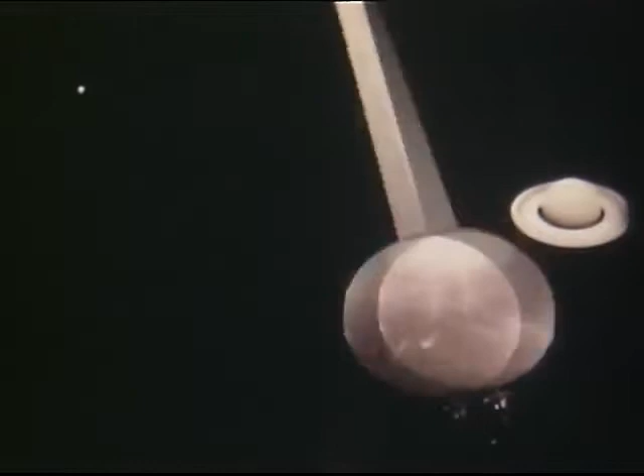Time, intangible, elusive time, measured in years by the broad movement of planets, measured in seconds by the inventions of man.

Seconds, tiny fragments of time, marching single file down through the ages, writing the pages of history as they pass in review. 60 seconds every minute, 3,600 seconds every hour, 86,400 seconds every day.

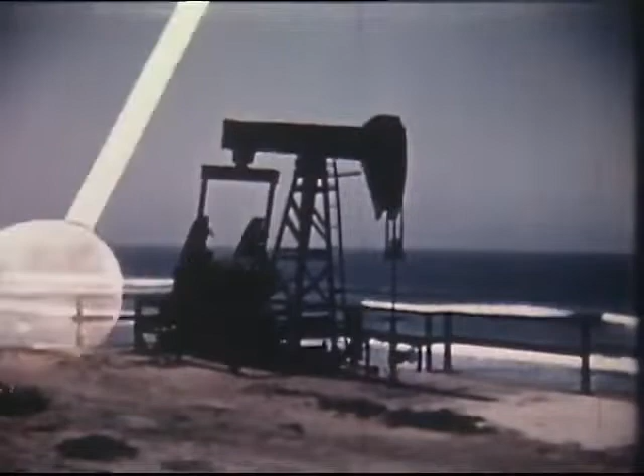And with the fleeting life of each and every second, more than 6,000 gallons of oil are brought up from the earth.

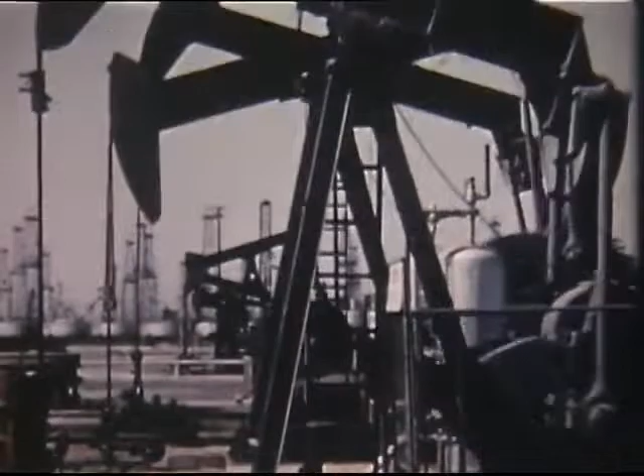Oil from the east, oil from the west, the north, and the south, oil from 30 states of the USA, and from 50 countries of the world. Oil coming from the earth in huge quantities to fill our increasing demand. In the United States alone, enough oil is produced daily, in fact, to float a giant ocean vessel.

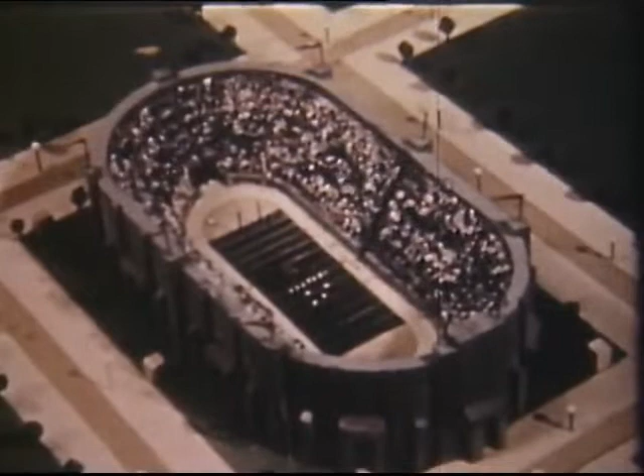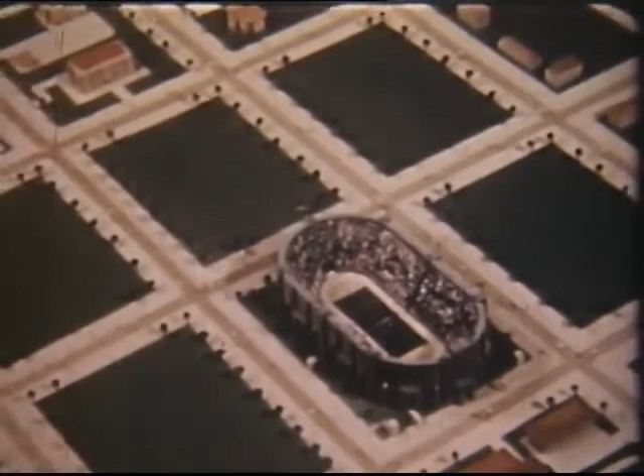And that's a job calling for a lot of manpower. For example, a famous football stadium seats over 100,000 persons. Yet 20 stadiums of this size can be filled to capacity by the number of persons steadily employed in the oil industry.

Many men, many jobs, and all because less than 100 years ago, someone had an idea. An idea that perhaps a man could find oil in huge quantities by boring a hole into the earth. The idea of drilling specifically for oil was new, but the principle employed was an old one.

Almost 3,000 years ago, the ancient Chinese had developed a laborious method of drilling for salt. The well drillers would jump on a springboard, something like a diving board. This would give slack to the rope supporting the drill tool, causing the tool to drop and pound into the earth.

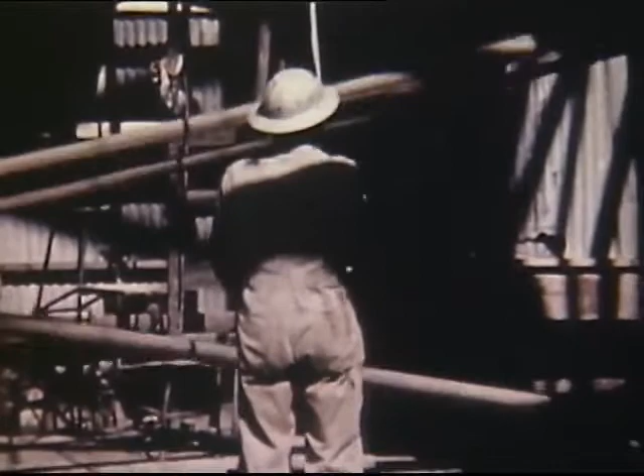Out of this principle evolved the early method of drilling for oil, cable tool drilling, in which a walking beam took over the job of lifting and dropping the drill tool to pound a hole.

Now, there are two common ways of forming a hole. One way is to pound or punch out a hole, as in cable tool drilling. The other way is to bore or scrape out a hole, and that's the idea behind modern rotary drilling.

Using rotary drilling methods, the search for oil has gone to almost unbelievable depths. The famed Empire State Building towers more than a quarter of a mile above the streets of New York. Yet its colossal height could be sunk into the depths of one of the world's deep oil wells.

And another such building, and another, and another, and yet another, until 15 Empire State Buildings had been sunk to approach the depths which have been reached by rotary drilling.

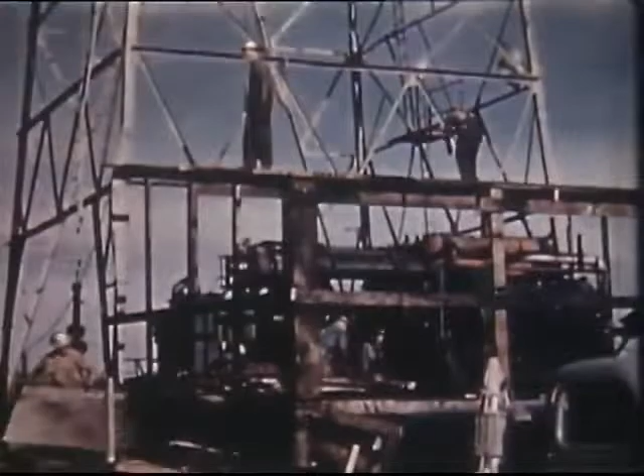Suppose we watch the big job of sinking a deep well by the rotary method. The work begins with the erection of the derrick and the installation of the rig.

This equipment may have cost up to $250,000, not to mention the $50,000 that may have been spent just getting into the well location. Before this exploratory well is completed, it may represent an investment of $1 million, and the chances of actually finding oil are about 1 in 9.

With the derrick and rig installed, drilling operations get underway. We are making holes.

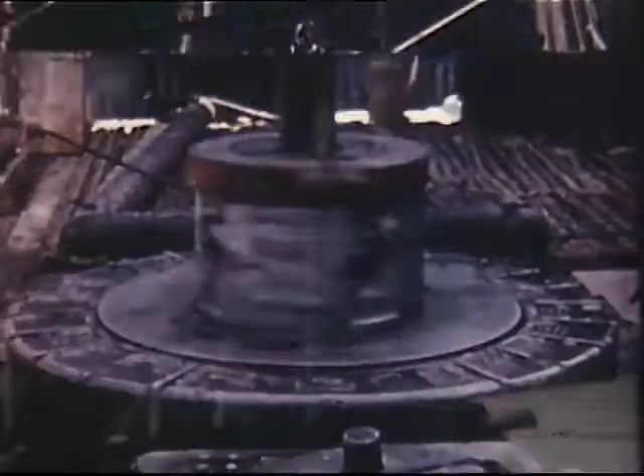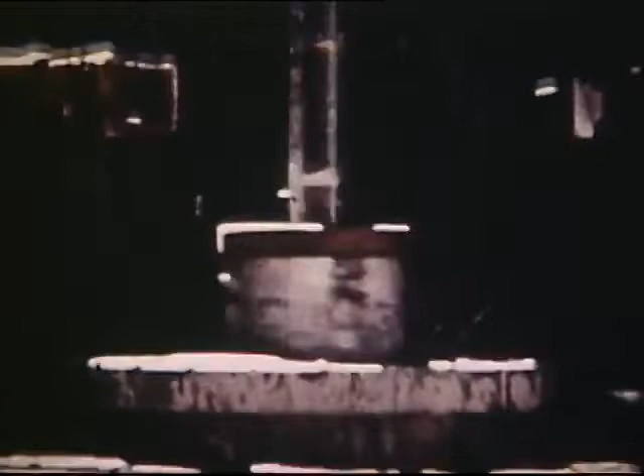A heavy steel rotary table turns the drill string below ground. A square hollow pipe called the Kelly works off the rotary table and fitting through a square hole is free to move up or down.

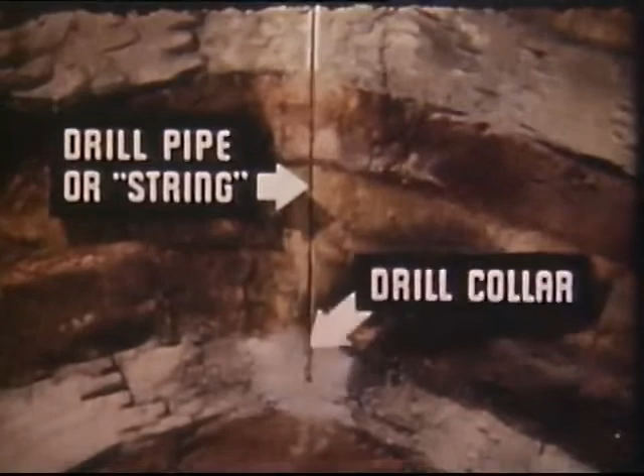Fitted to the Kelly is a length of drill pipe. More and more of these 30-foot sections are added as the well goes deeper. At the end of the drill pipe is a drill collar, and below this, the bit.

There are more than 50 different bits. Here, a simple one is used to cut through the soft surface formation.

Mud, scientifically treated mud, plays a highly important role in drilling operations. Circulated by a battery of powerful pumps, the mud is forced up into the swivel.

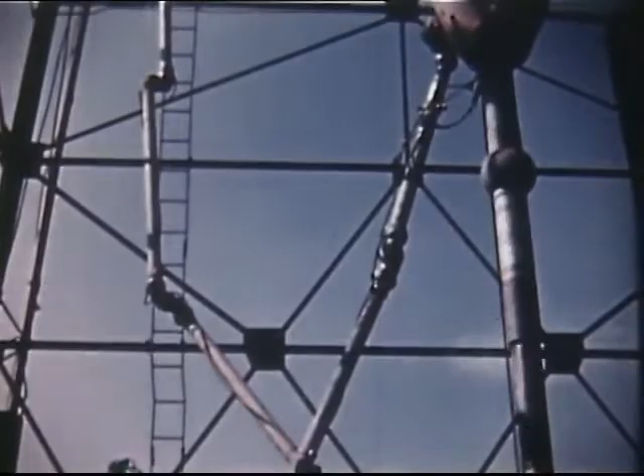Surging down through the hollow pipe of the drill string, it jets out around the bit to perform vital cooling and lubricating action. Returning up outside the drill pipe, the mud seals the walls of the well.

This helps maintain pressure and prevents the walls from caving in.

In addition, the mud carries up the drill cuttings from the bottom of the well, providing important information about the strata which is being penetrated.

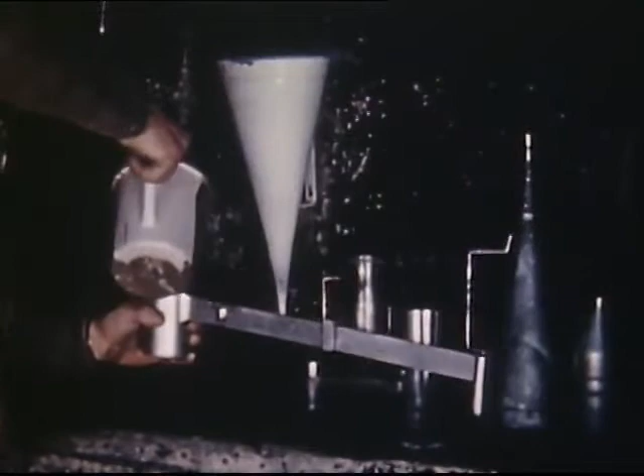This is mud with a college education. Special chemicals and weighting materials are added from time to time to maintain the formula in precise balance.

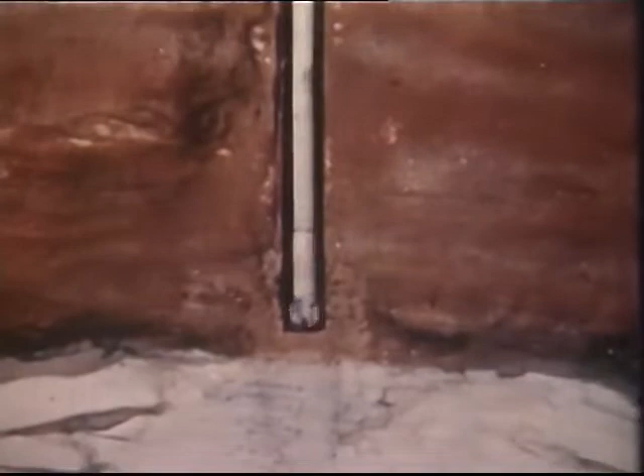As drilling progresses, various types of underground formations are encountered. Now we're getting into hard stuff. We'll have to exchange our bit for one designed to penetrate this harder formation.

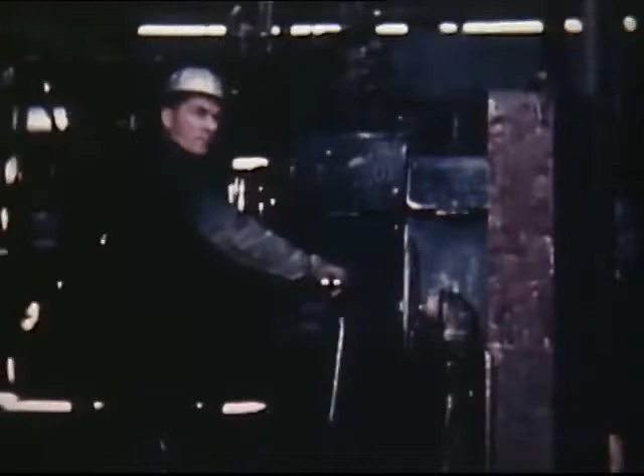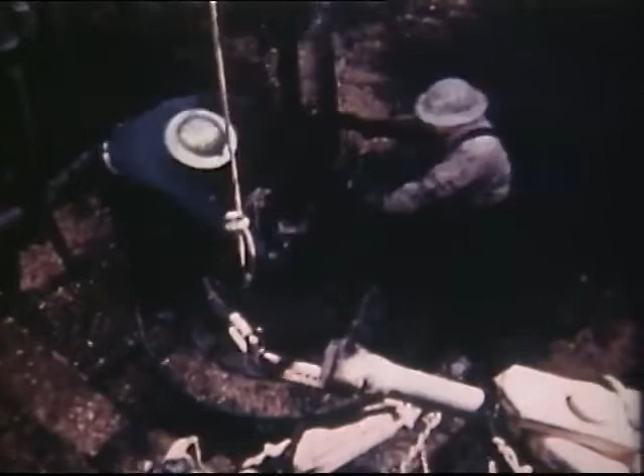Let's pull her up. This means pulling the string, a long job calling for precision teamwork between the members of the drilling crew and the ponderous equipment at their command.

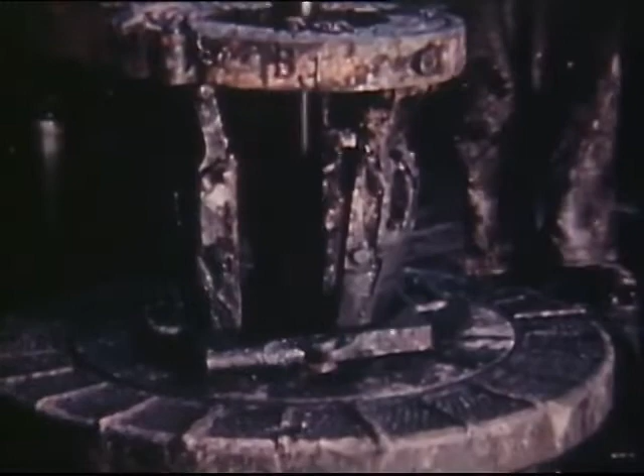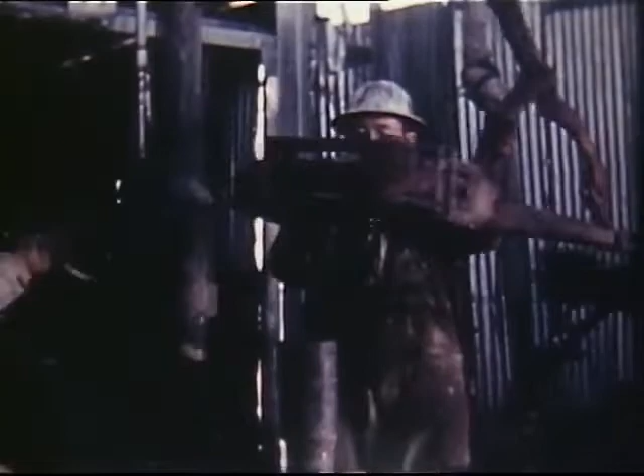Section by section, the huge pipe is hauled up, carefully disjointed and stacked. Five men working as one, handling tons of steel with a confidence born of long experience.

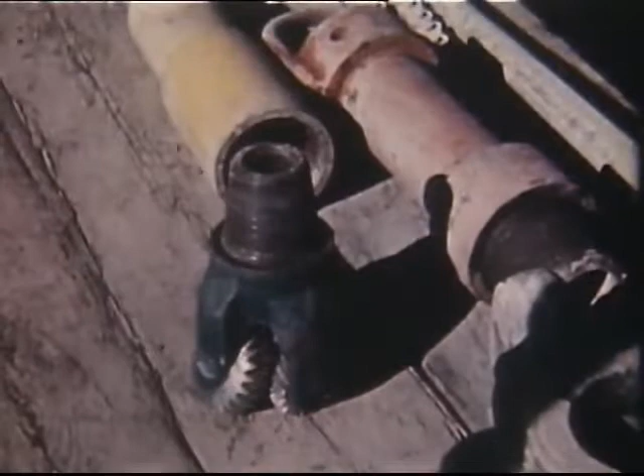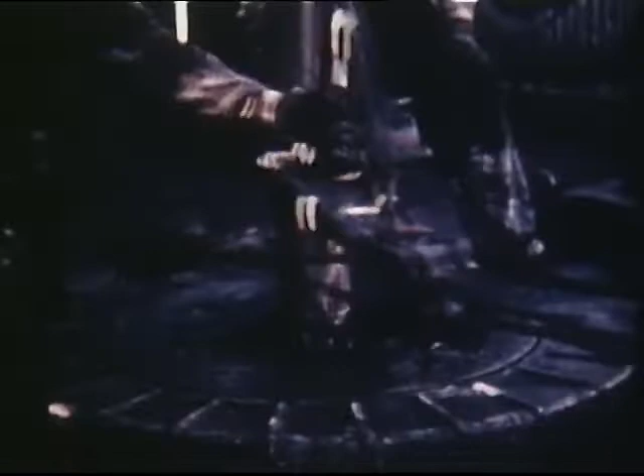And here's the new bit, designed for chewing through hard rock. This and many others will be worn out before the drilling is completed. After the new bit is in place, we'll have to recouple and lower the string again.

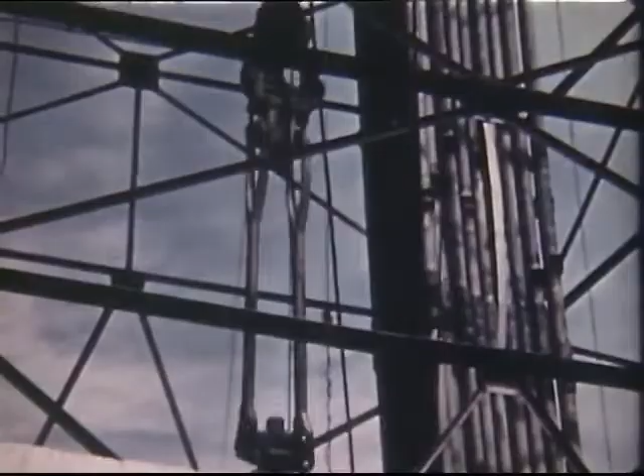With drilling underway once more, 3,000, 4,000, 5,000 feet down, the going gets tougher, slower. Hard rock and soft. Uh-oh, trouble.

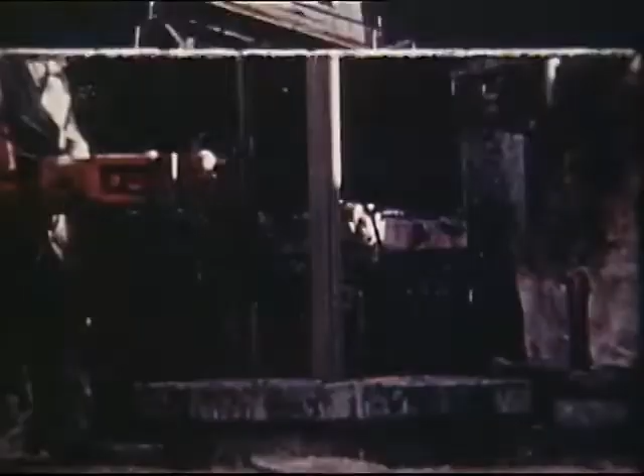Yes, real trouble. A broken drill string. We'll have to quit drilling for the time being and go fishing. An attempt must be made to bring up the twist-off, or fish, from its position thousands of feet below.

And here's the fishing tackle, a socket designed to slip over the broken end of the drill string with dogs to clutch it. It is lowered into the well on the drill string.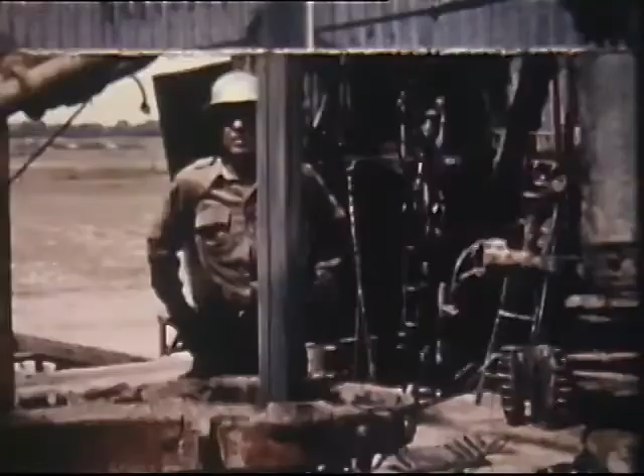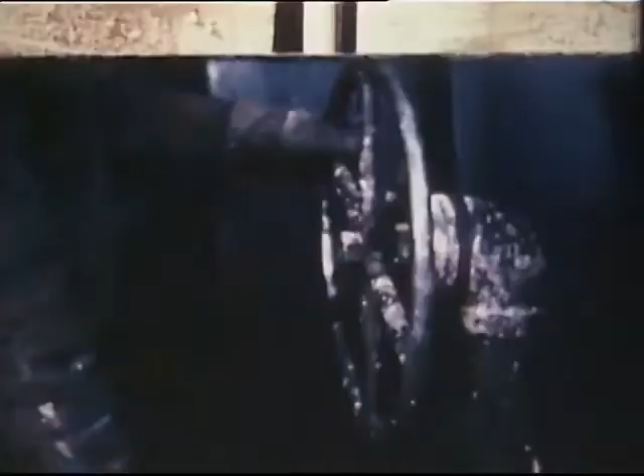The operation may take several days. Sometimes the fish refuses to be caught, even after every possible type of fishing tool has been used.

With the fishing not making much headway, the engineers must decide whether to continue this costly operation, or to abandon the well, or to whipstock. The decision is whipstock. We'll try to go around the broken drill string by veering off from the straight hole.

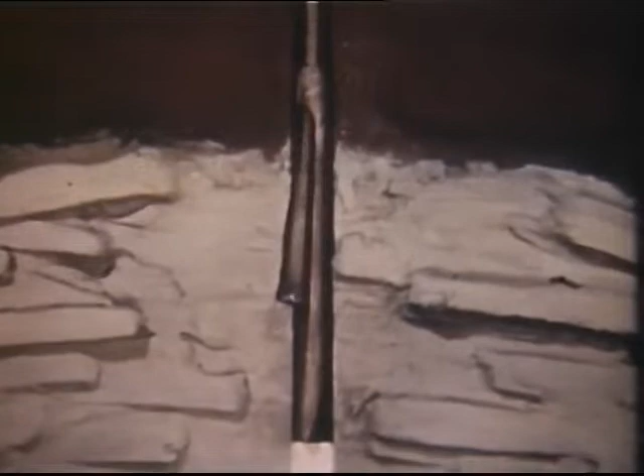Yes, now we're doing exactly that by directional drilling. With a whipstock, a beveled piece of steel shaped to deflect our bit over at the precise angle desired, we are accomplishing the seemingly impossible feat of drilling a curved hole.

We have angled our well over to bypass the broken string. And again, the drilling is continued, but now more cautiously than ever.

We're down past the 10,000-foot mark and nearing the spot that our scientists tell us should be productive formation. Rate of penetration has increased. Soft formation, and maybe—well, we've got to get a sample of what we're hitting down there.

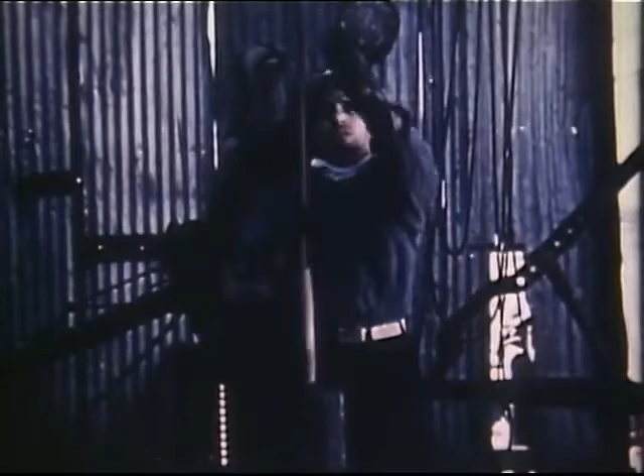A special core-taking barrel is lowered into the drill string by means of a cable and windlass. The core barrel, held firmly within the drill collar, works like Grandma's cookie cutter. It slices out the desired core sample, which is retained within the barrel and hauled back to the surface on the cable.

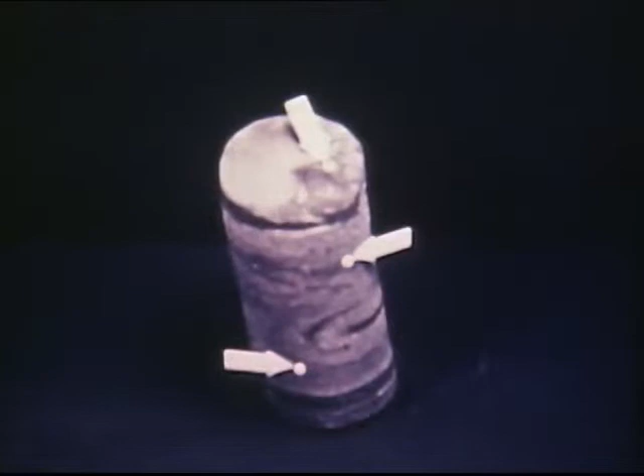A careful analysis proves our core to be essentially water-bearing, despite minor oil stains. Not good enough for production. Disappointing, but maybe a little farther down.

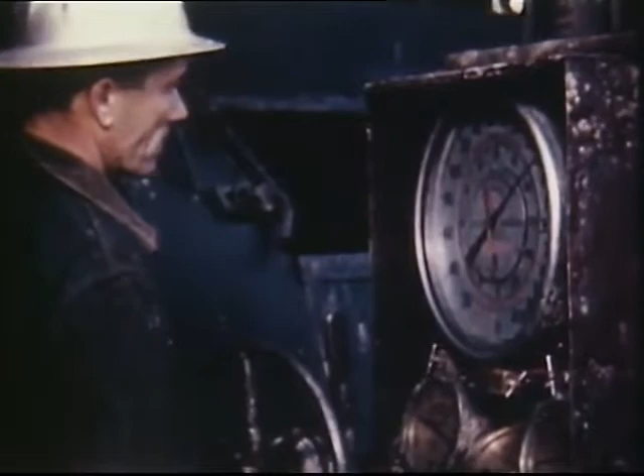Another 300, 400 feet, and again the speed of penetration picks up. This time, we'll use electric logging to see what we're getting into.

This device consists of a group of electrical instruments which enable us to get an indication of the physical character and fluid content of the formation we have penetrated. The reading looks favorable. We'll case the formation off.

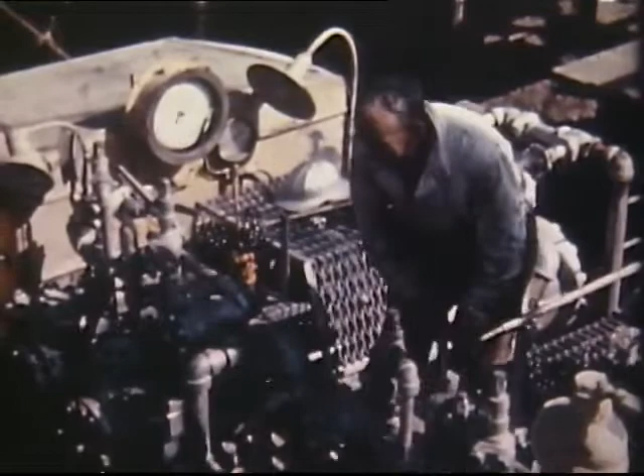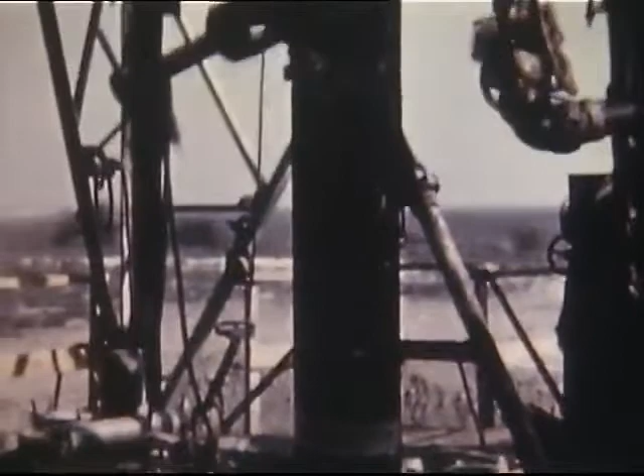A cementing outfit is called in. The cement is mixed on the spot and pumped to a special connection at the top of the casing. Forced down with mud, the cement rises between the casing and the wall of the well. The cement is allowed to harden.

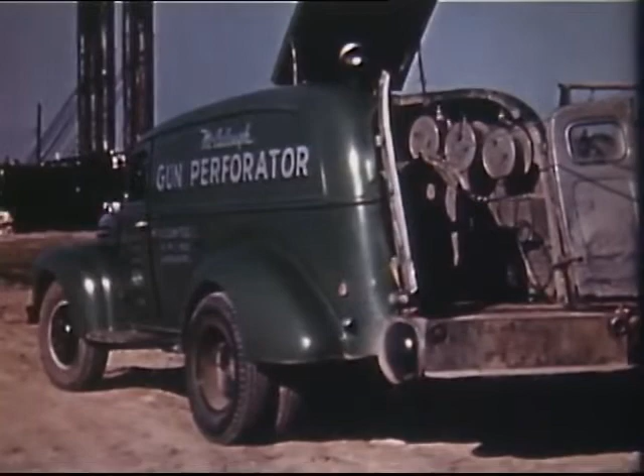And now we are ready to cut loose the heavy artillery. A gun perforator is lowered into the well. The device is fired. Heavy caliber bullets pierce the steel casing and cement to let in the oil.

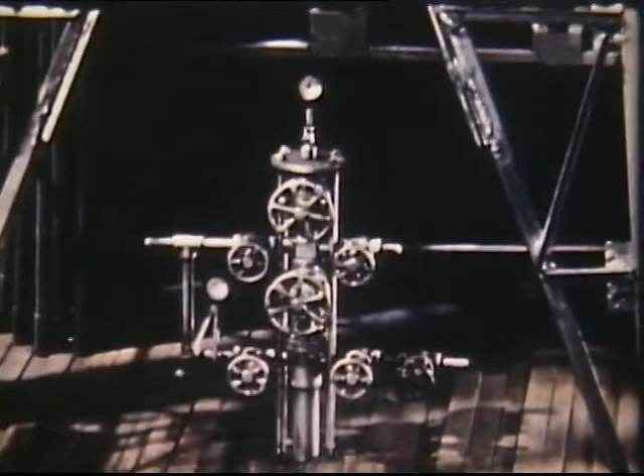Now tubing has been run into the well, and if she's going to produce, it'll come through that tubing. A Christmas tree has been added to control the expected flow. Oil or water is forced through the tubing to flush out the mud.

Only about one out of nine exploratory wells is productive. A few tense seconds, and we'll know about the one we've been working on for so many weeks. It's now or never.

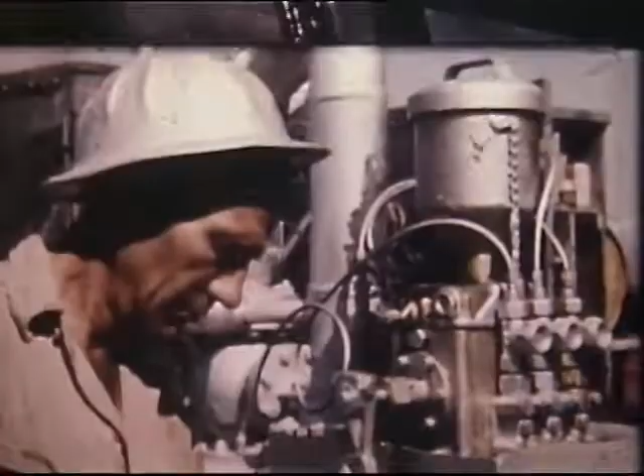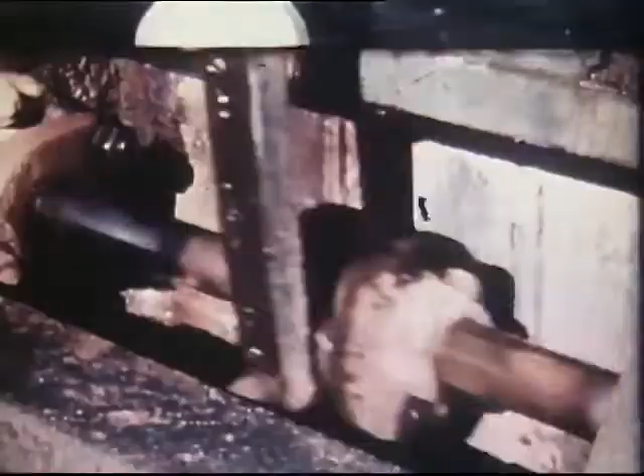We've brought her in. It's the birth of an oil field.

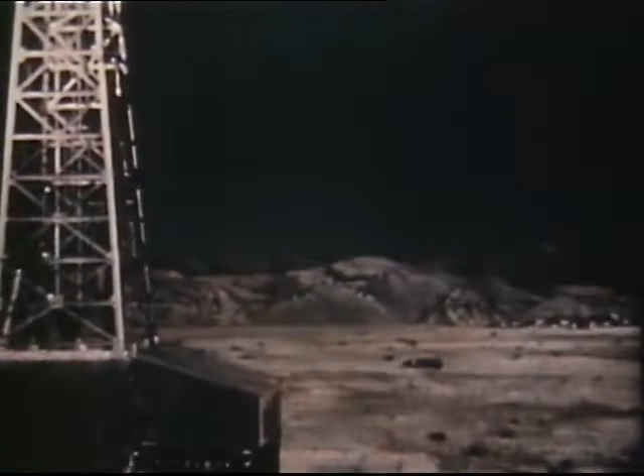Yes, it's the birth of an oil field, one more victory in the ceaseless night and day job of searching, drilling, and bringing up from the earth new supplies of petroleum to fill the increasing demands of modern living.

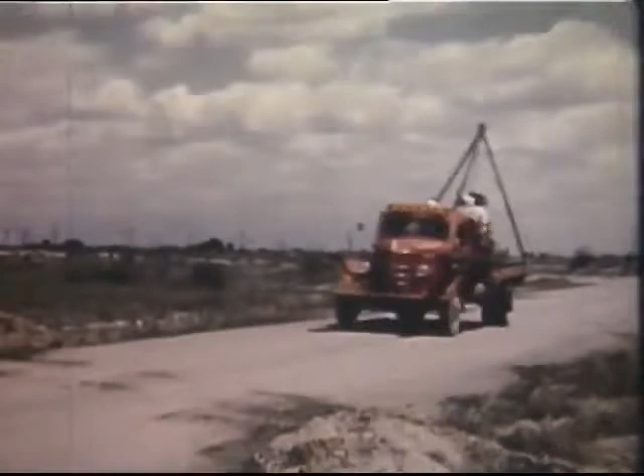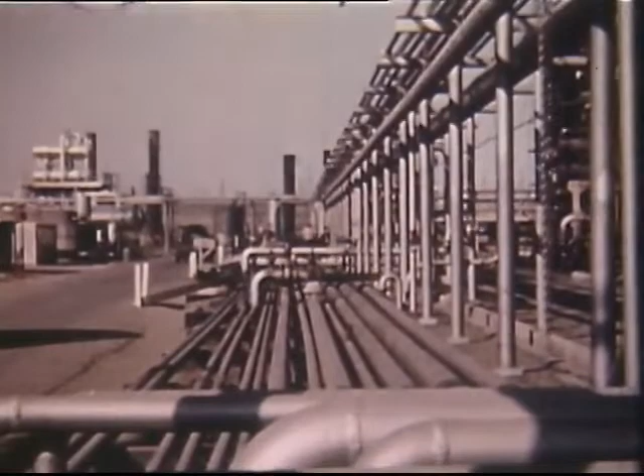We drilled a well and found some oil. Now begins the many-sided job of production, getting the oil out of the ground and into the refineries. To produce oil efficiently from this area, additional well locations must be scientifically plotted and drilled in. Roads must be built, equipment installed, oil storage and treatment facilities erected, pipelines laid, 1,001 tasks performed by men of almost every sort of skill and training.

Perhaps you'd like to meet one of these oil men, a production engineer. His job is conservation, getting the last possible oil from nature's reservoir, and getting it efficiently.

Pardon me, Mr. Benson, mind if we ask you a question? Why, certainly not, but keep it simple, will you? Well, this should be easy for you. When you drill in a well, what makes the oil flow to the surface?

Well, actually, some new wells never do flow. However, when an oil well does flow unaided, it's usually because of gas pressure, water pressure, or a combination of both. Take a look at that model, for instance.

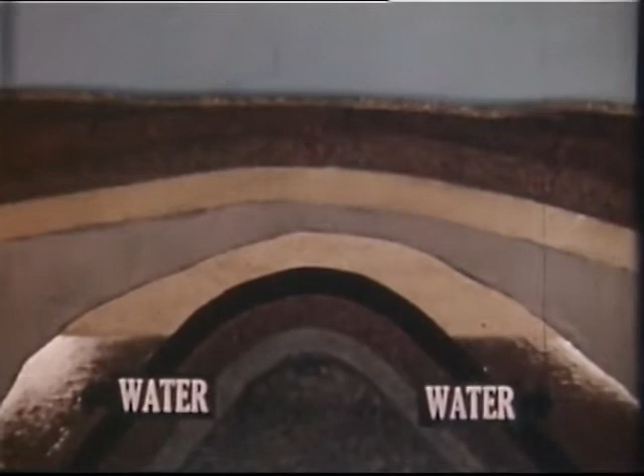That's a simple anticlinal structure, an oil trap. The oil-bearing stratum is sandwiched between layers of impervious rock, which prevent the oil from escaping. Oil deposits occur in the pores of rock, not in underground pools or lakes. Usually there is water found in connection with oil deposits. Since oil is lighter than water, the two will be separated, the oil occurring above the water.

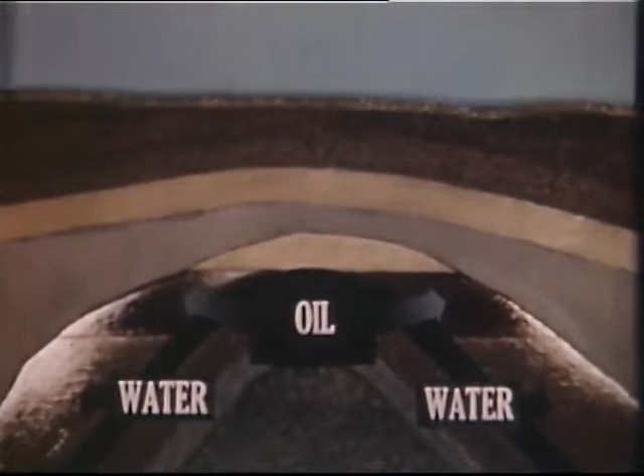Where there is oil, there is gas. Gas will always be found dissolved in the oil, and in some cases, additional gas will occur in a free state above the oil. So much for setting the stage.

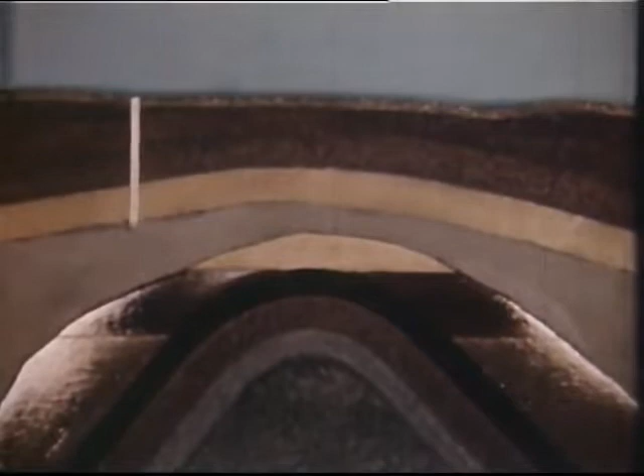Now, suppose we sink a well and tap the oil sands. If the well flows, it means that some form of natural energy is working for us. Otherwise, we'd have to pump, right? Right. Okay, now in a flowing well, the main source of energy that lifts the oil is, in most cases, expanding gas.

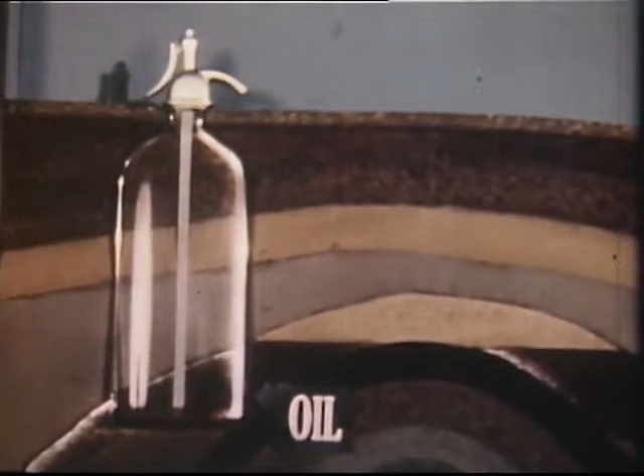Now, the expanding gas, well, here, let's take this siphon bottle. Our flowing well is similar to the tube in the siphon bottle. It reaches into the oil zone, and when the valve is opened, the energy of the expanding gas raises oil as a mist or foam.

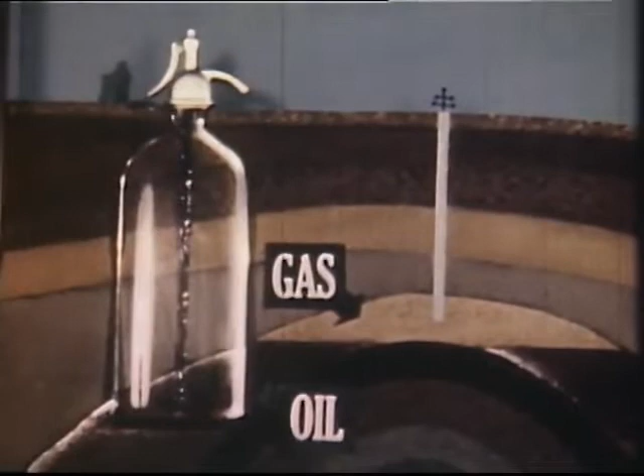Now, suppose we sink another well in a different location. Unfortunately, we've missed the oil zone. Well number 2 is like the shortened tube in the siphon bottle. It can produce only gas. Hence, we would leave it shut in. We want to conserve the gas energy for driving the oil up well number 1.

As we continue to produce oil and gas from the well, the free gas has more room to expand. As a result, the gas pressure gradually declines. The well may flow for months or even years, but the decline in gas pressure is inevitable. Eventually, a point is reached where there is no longer sufficient pressure to force the oil to the surface. In this case, the well will have to be pumped.

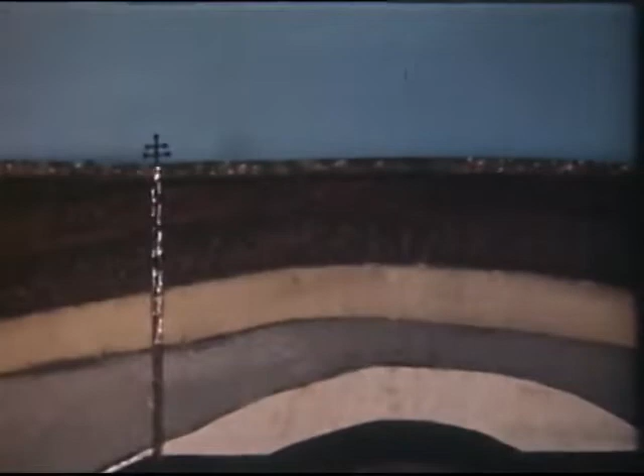Now, we've been talking mainly about lifting oil to the surface. But remember, the oil must also be moved from various parts of the formation into the well. While gas plays an important part in bringing oil into the well, there is another force which in many fields is equally or more effective in this work, the driving force of encroaching water.

This water exerts pressure from below, and as oil is produced at the surface, the incoming water replaces it. In time, however, the natural forces exerted by water or gas or both may become too weak to move the oil into the well at a sufficient rate.

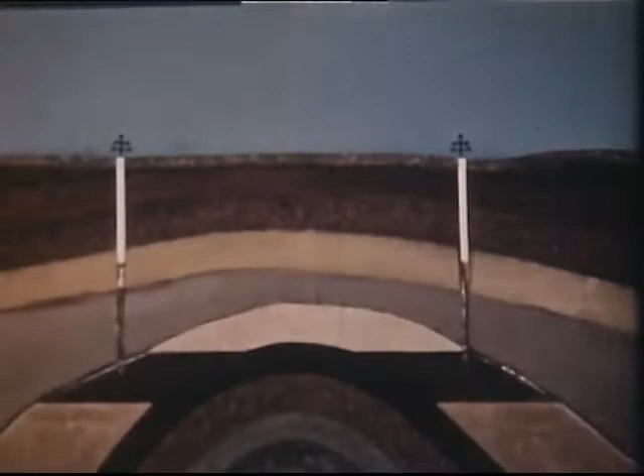Well, what do you do then? Well, there are several methods of recovering a portion of the oil remaining in the formation. They involve what we call repressuring. In one method, enormous quantities of gas are pumped back into the formation. In this way, part of the original gas pressure can sometimes be restored, causing the wells to produce at a higher rate. In another method, large volumes of water are pumped into certain wells.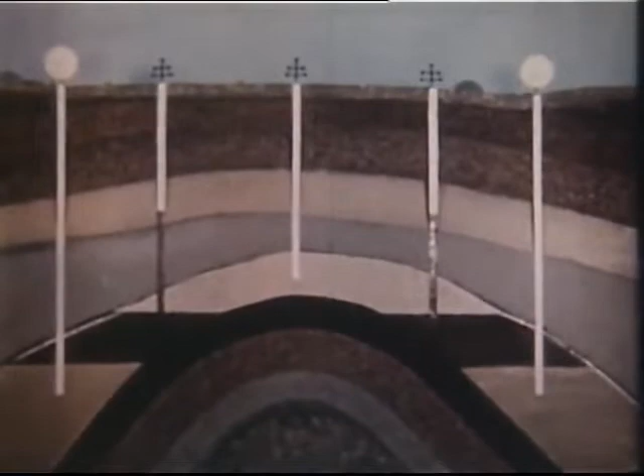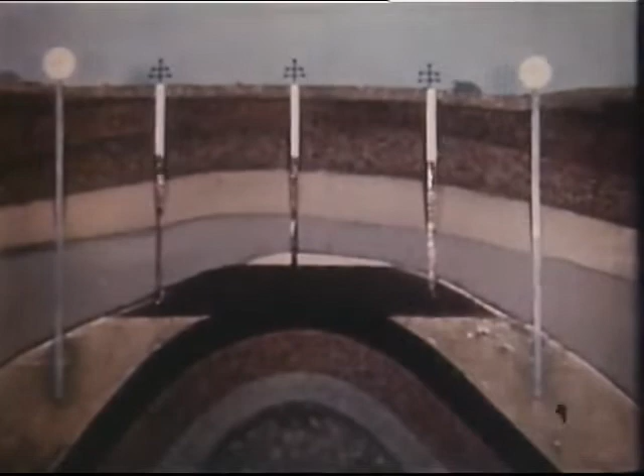This creates an artificial water drive, forcing the oil to the other wells. Well, I can see that there's more to this oil business than appears on the surface. Oh, you're right about that.

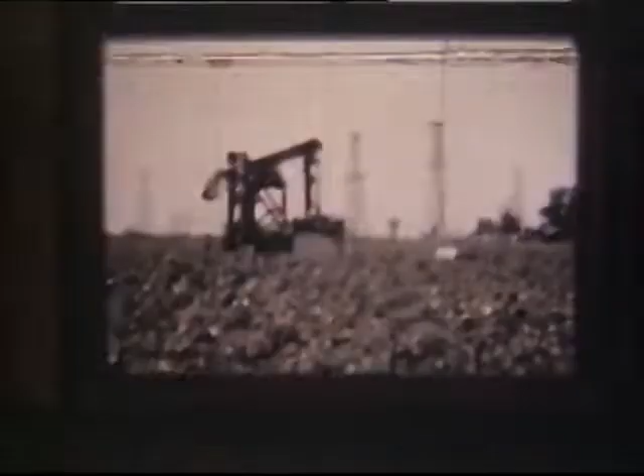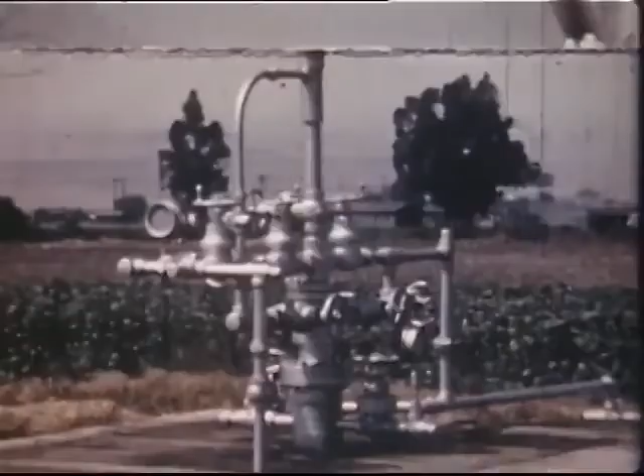Now let's step over here for a minute and take a look out the window. There's a modern oil-producing field for you. The derricks have all been removed, farm crops growing nearby, and no sign of the wells except for a neat little Christmas tree. The Christmas tree is simply a group of valves and pressure gauges used to control the flow of oil and gas from the well.

We try to conserve the natural gas pressures as long as possible by producing the most oil with the least amount of gas. Of course, day by day, the gas pressure declines, and eventually there won't be enough pressure to force the oil to the surface.

What do you do then? The well must be pumped. There are many different types of oil pumps, but they all work on much the same principle. Like Grandma's old-fashioned cistern pump.

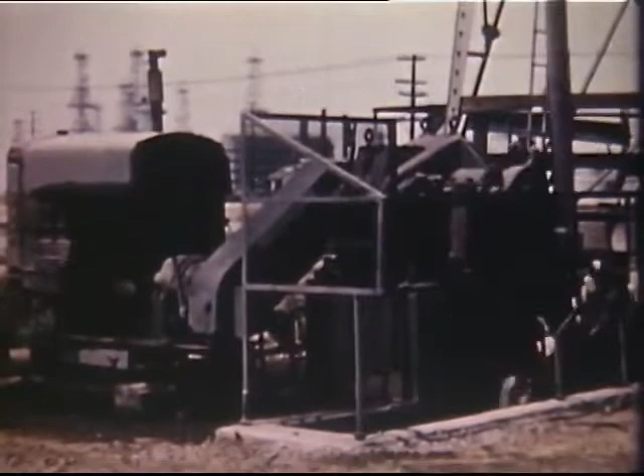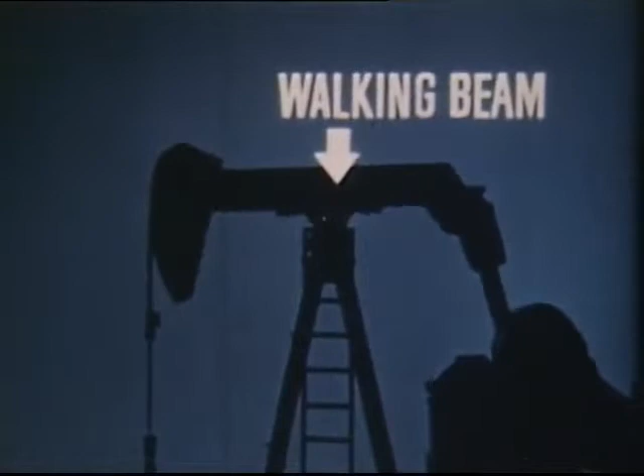Only Grandma had to use elbow grease to get the water out. Modern oil well pumps are usually driven by power plants which use natural gas from the fields or electricity. The power plant actuates a walking beam, which in turn imparts an up and down movement to a string of sucker rods.

The sucker rods are connected to the pump at the bottom of the well. Simple valves open and close with the motion of the pump, raising the oil to the surface.

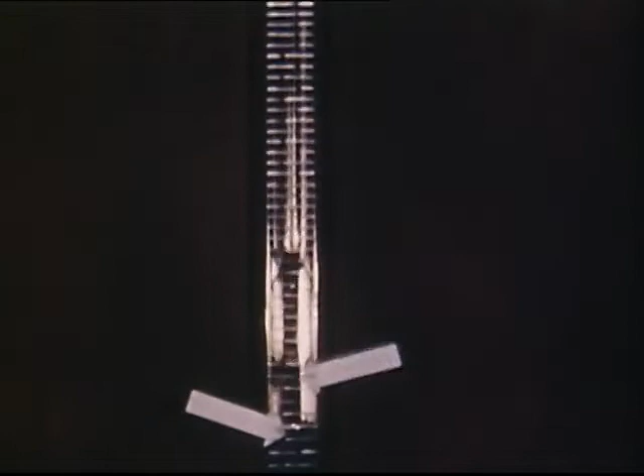Boy, certainly takes a lot of equipment to produce oil. Yes, and actually, you've seen only a small part of it. Well, what else can I do for you? Got time to answer one more question? Why, surely, what is it? What do you do with the oil after you bring it to the surface?

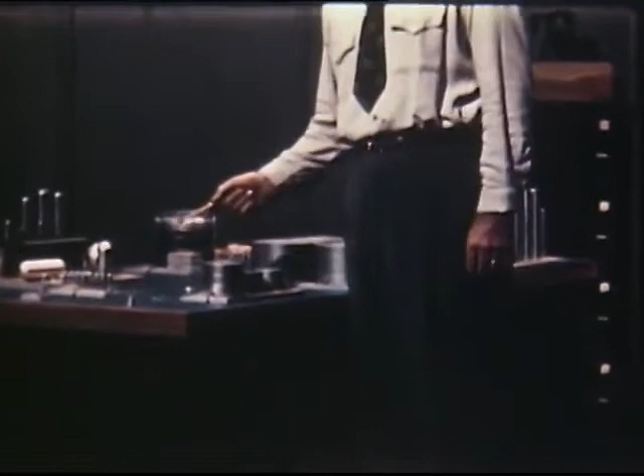In a word, we move it into the refineries. Here, take a look at this model setup. I think it'll help answer the question. This layout represents the whole business of oil production in a nutshell.

Generally, the product of an oil well is a mixture of oil, gas, and water. This mixture flows first to a gas trap. The gas trap separates the so-called wet gas from the oil and water.

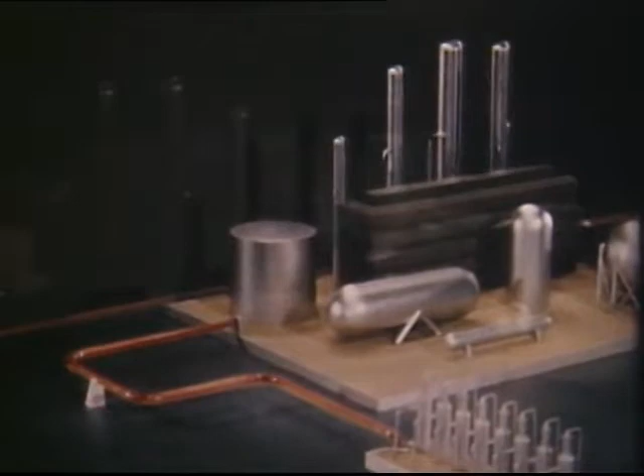Leaving the oil for a moment, let's follow the wet gas to an absorption plant. Here, the wet gas is literally dried by extracting liquid products such as natural gasoline, propane, butane, and isobutane.

From the absorption plant, the dry gas goes to public utility companies, who in turn supply it to homes and industries for heat, power, and manufacturing processes.

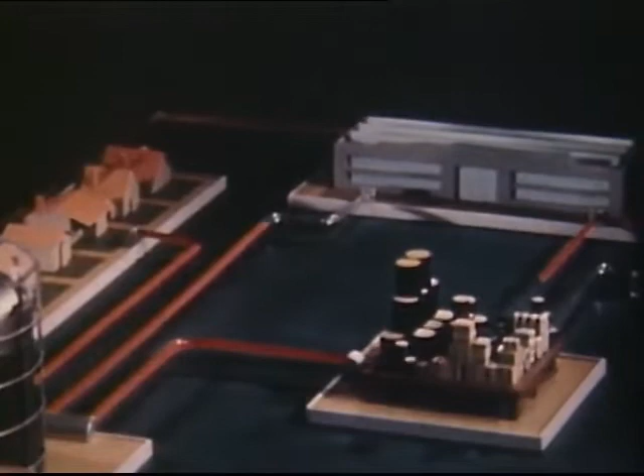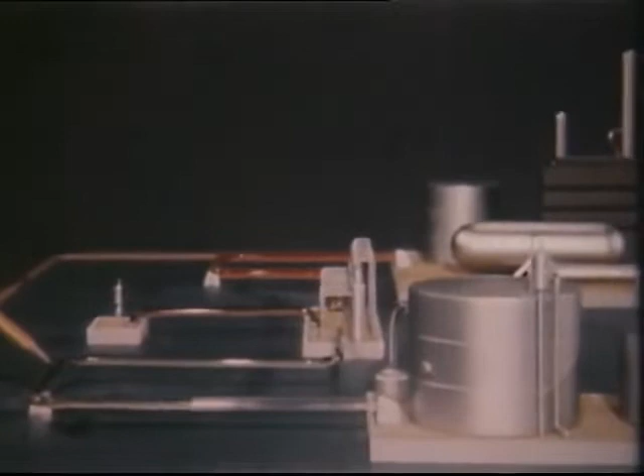So much for the gas. Now let's go back to the gas trap and see what happens to the oil. After the wet gas has been removed, the oil usually flows to a dehydration plant or settling tank, which serves to remove water from the oil.

The treatment and disposal of this unwelcome water is quite a story in itself. But let's follow the clean oil now to the field tanks.

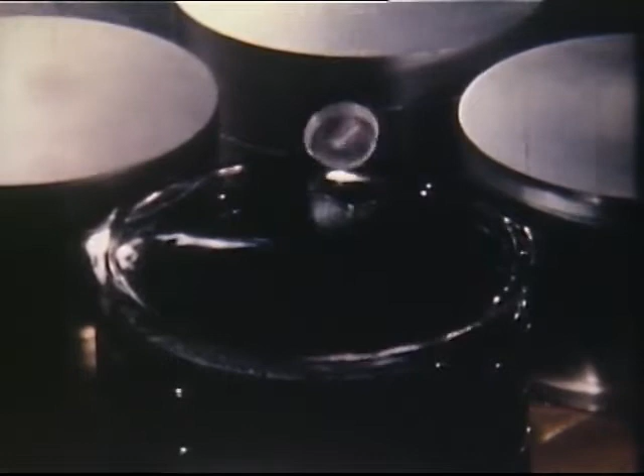When these tanks are full, the quantity of oil in the tank is measured or gauged. At the same time, samples of the oil are taken from the tanks and sent to a laboratory, where tests are made to determine the quality and value of the oil.

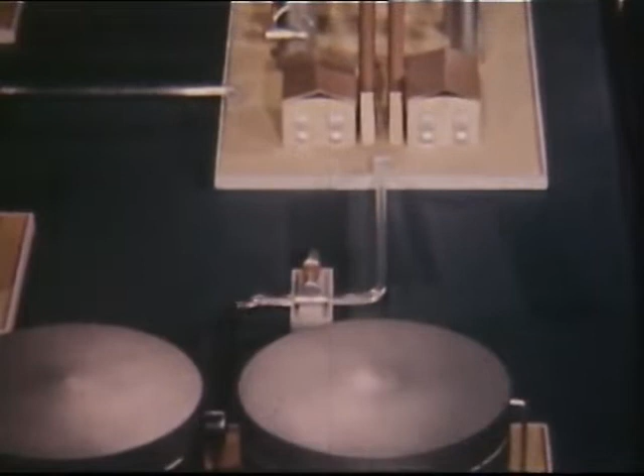From the field tanks, the gauged and tested oil moves to a pumping station, where it is boosted along on the last stage of its journey to the refineries. And that's where our job of production ends, and the complex job of refining the crude oil into marketable products begins.

Many men, many jobs, and all because someone had an idea. An idea that expanded into a major industry, transforming vast areas of worthless land into gainful property,

benefiting thousands of private landowners through the monthly payment of royalties, giving birth and sustenance to hundreds of clean, orderly communities around oil-producing and refining centers, and developing a multitude of products which contribute so much to man's comfort in terms of heat, power, freedom of movement, and physical well-being.

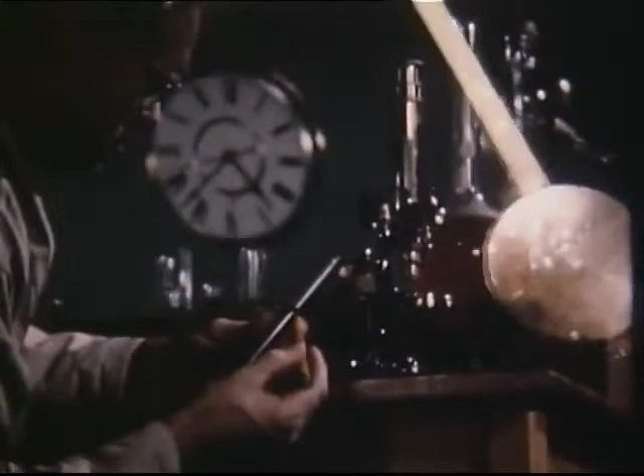Only time and continuing research on the part of the petroleum industry will reveal what added comforts may be developed for the generations of today and the generations of the days to come.